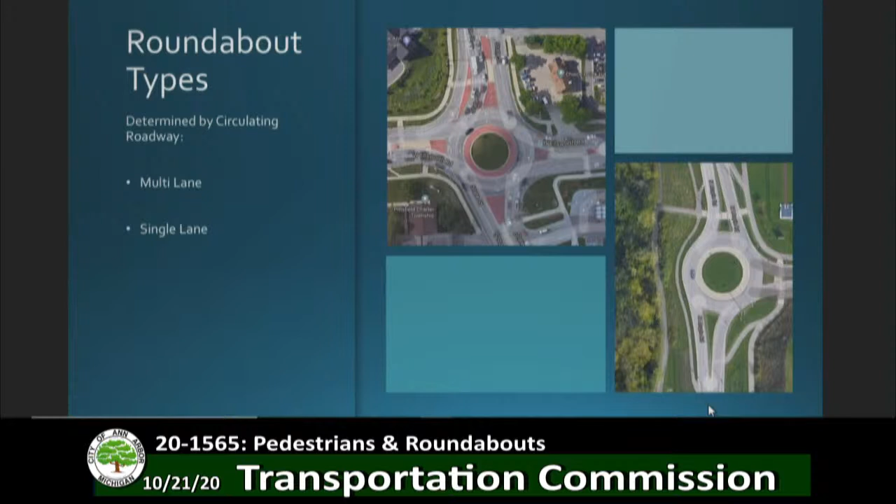The majority of the roundabouts we have in the city are single lane roundabouts. We have 60% that are single lane and 40% that include more than one lane at some point in the circulating roadway. I've listed here a series of where the roundabouts are, the ones under the jurisdiction of the city of Ann Arbor, MDOT, and the Washtenaw County Road Commission. I'm going to kind of skim through that.

The next things we'll be talking about are really the key features of roundabouts and how those go into safety. I'm going to proceed to save time. Our first key area is yield control.

So for a modern roundabout, vehicles yield upon entry to the roundabout. There are really two zones of conflict for motorists entering a roundabout. The first area is where you need to be looking for non-motorized activity within the crosswalk, and that is the first area you will come to. As that has no other form of control, Ann Arbor's crosswalk law applies at this location, so motorists are required to stop for pedestrians within or approaching the crosswalk. The second area of conflict is the yield line, where a motorist yields upon entry to anyone already in the circulating roadway.

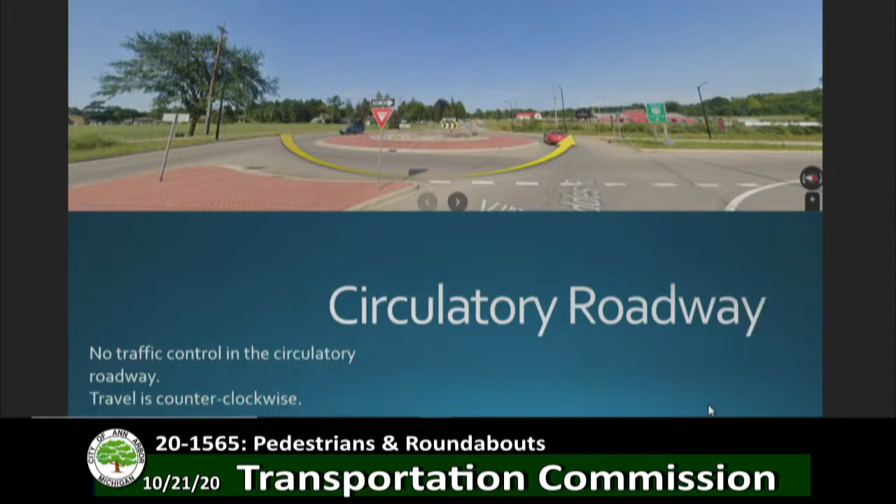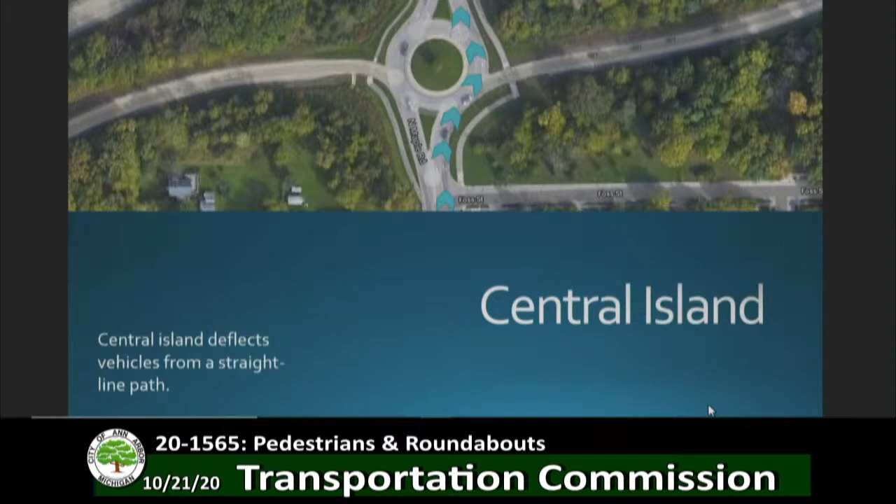The biggest feature of these intersections is their central island, and that central island deflects vehicles from a straight line path, which encourages slower speeds. That's really the big feature that makes this circular intersection so special. Supporting the central island, we have our splitter islands, which are there to separate, deflect, and slow traffic.

Splitter islands also provide refuge for pedestrians crossing the approach. The design of these islands is really important to get vehicles in proper alignment to travel through the circulating roadway and to achieve that initial slowdown. They're really part of reducing the speed along the fastest path of travel across the intersection.

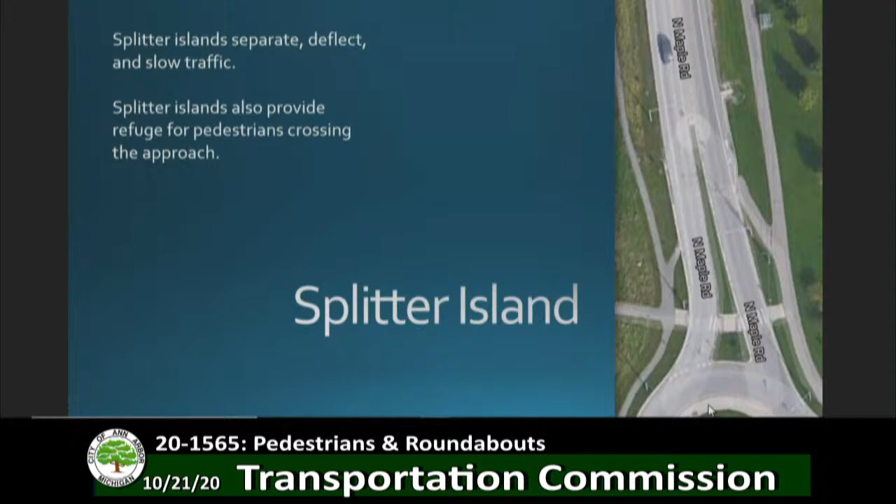Landscaping is another key feature. It provides a visual screen for drivers, making them aware of the intersection and directing their attention to look left.

This particular example is Nixon and Huron Parkway. There's an agreement with an adjacent property owner who takes care of the landscaping at this intersection, and they choose to do a little bit extra with some of the annuals and things like that. This is a really important feature of roundabouts, because you're not supposed to be looking across a roundabout—you're supposed to be looking to the left and scanning for pedestrian activity at the crosswalk as you're entering.

Pedestrian access is also a very important feature in how we design our roundabouts. Pedestrian access shall meet ADA requirements, and crosswalks are designed in accordance with city guidelines.

Some of the questions that came in from the Transportation Commission involved how we do this well, especially for people who are visually challenged. It is true that roundabouts can be a little bit challenging for them—the circulating roadway can make it difficult for someone relying on the sound of an approaching vehicle to pinpoint where it's coming from.

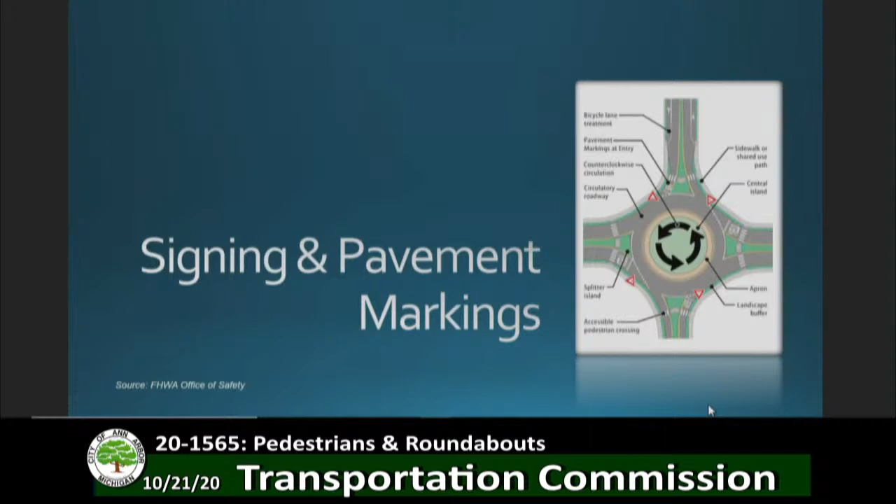There were tons of signs and all of those things. As our collective experience across the country with these types of intersections has matured, engineers and the Federal Highway Administration have come to recognize that too much information can be a problem. All of that signing is really a lot of visual stimuli, and it distracts from the really important things people need to be looking for, which are the non-motorized users and conflicts with vehicles. So that's why you may have noticed a simplification of signing over time.

Streetlights are another really important aspect of roundabouts, and particularly of—oh goodness, I'm running late, Kayla, I'm sorry.

At roundabouts particularly, we are looking at providing positive contrast lighting for the non-motorized conflict points, and ambient lighting for areas where vehicles could be, so that everyone can see a little bit better.

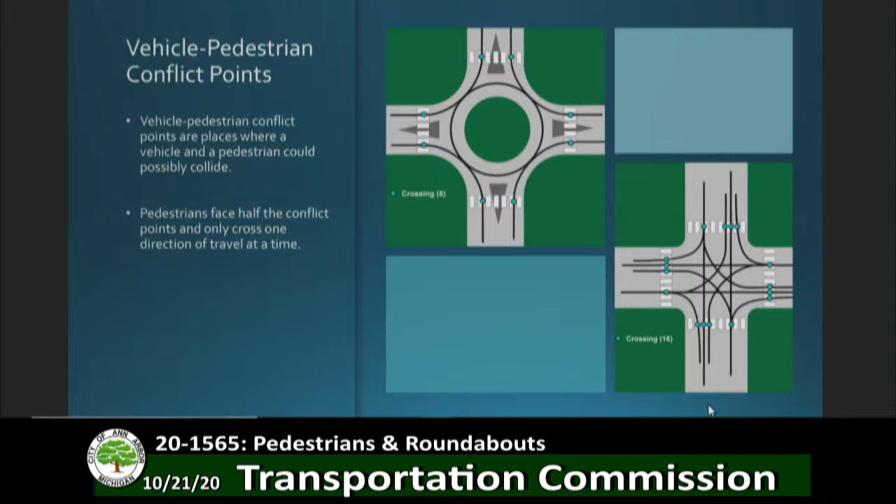Also, for vehicle-pedestrian conflicts, there's a reduction. It's not quite as significant, but the conflict points are reduced in half.

Some special safety considerations—we've probably already touched on some of these. Pedestrians are generally safer in roundabout intersections, although it can be a more active crossing, meaning everyone needs to be actively looking for each other. Pedestrians have the advantage of crossing only one direction of traffic at a time, and roundabout designs really focus on reducing driver speed. So when we slow speeds down, all of those interactions have the capacity to be much safer. When vehicles are slowed down, drivers have more time to perceive and react to conditions, and if someone does make an error, the reduction in speed reduces the severity of the outcome.

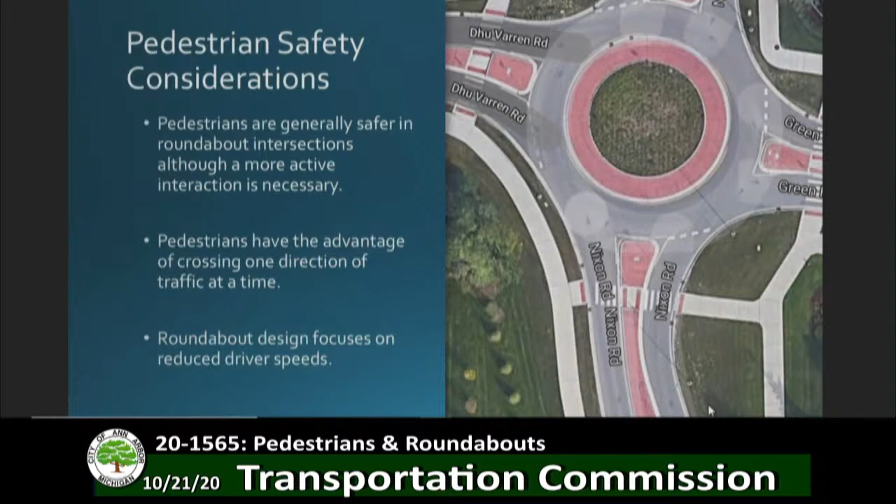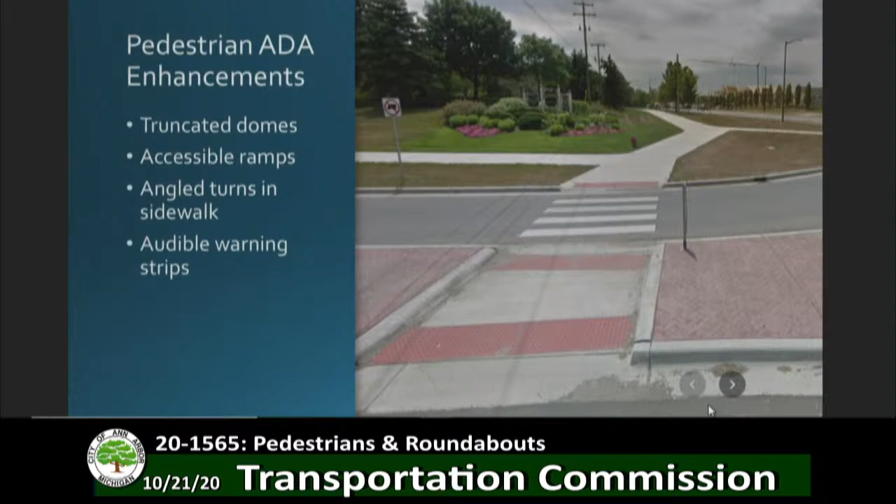Some of the ADA enhancements include truncated domes, accessible ramps, angled turns in sidewalks. We try to avoid curvilinear sidewalks so individuals don't get disoriented about which direction they're traveling, and audible warning strips, as we discussed before. I've also provided FHWA's list of where to consider roundabouts, and it's a very long list with lots of places.

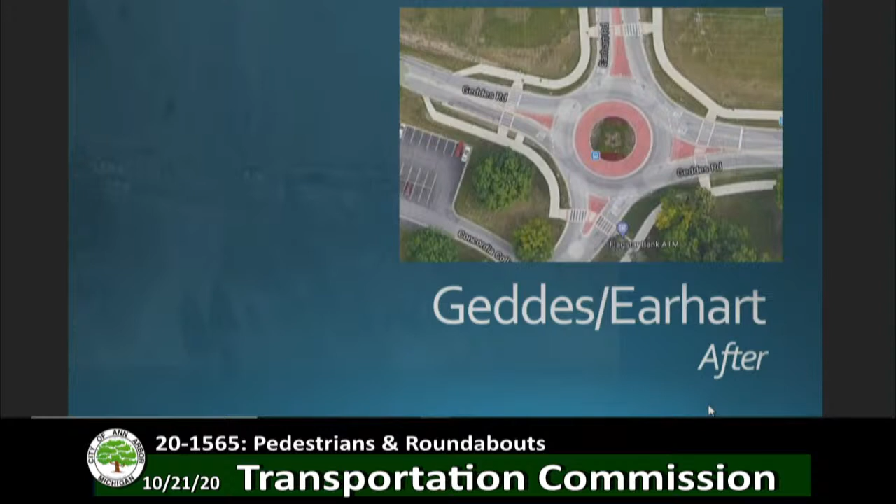And Geddes and Earhart before, Geddes and Earhart after - lots of pedestrian facilities have been installed out there that weren't there previously. So I apologize for rushing through that, but not quite fast enough, I'm sure.

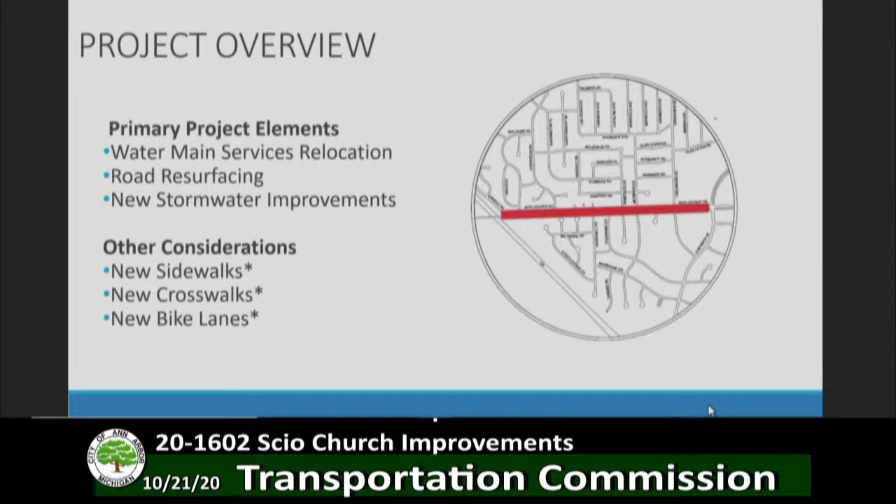We had a public meeting in January where we described all the options that we thought we could consider. We had ideas of where we would want to put the bike lanes, the crosswalks, and the sidewalks, or the sidewalk gaps in our system - the entire project limits would be filled with this project.

We were hoping that everyone would be in favor of that. We had the meeting, we had a poll to consider the bike lanes and the sidewalks, but also we had a large map that everyone could put little notes and pinpoints on where they wanted to cross. There were some locations that the non-motorized transportation plan had encouraged, and we were getting feedback from that.

We described all the options, construction conflicts, and impacts to everyone, but primarily what I'm going to share with you tonight is the feedback we got on the active transportation improvements. First, we polled everyone about where they lived in the property. This is what we got regarding the locations and the residents' involvement.

What the primary interest was in the project - we can see on number E, the active transportation features, that was very large, over 52%.

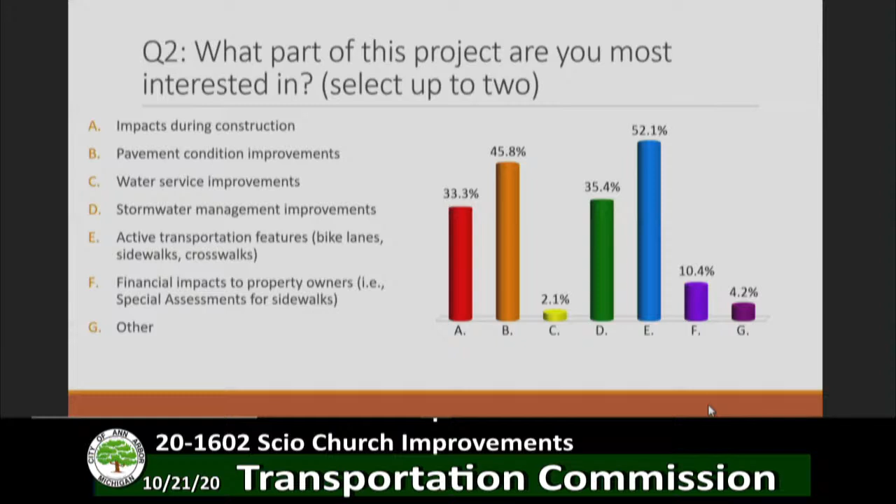There's parking along Scio Church between Greenview and South Maple that we would want to eliminate to install bike lanes, and we wanted to see if people were interested in doing that. So at the public meeting, we did get a 56% yes answer to that. Later, you'll see some more polling that we did on this question.

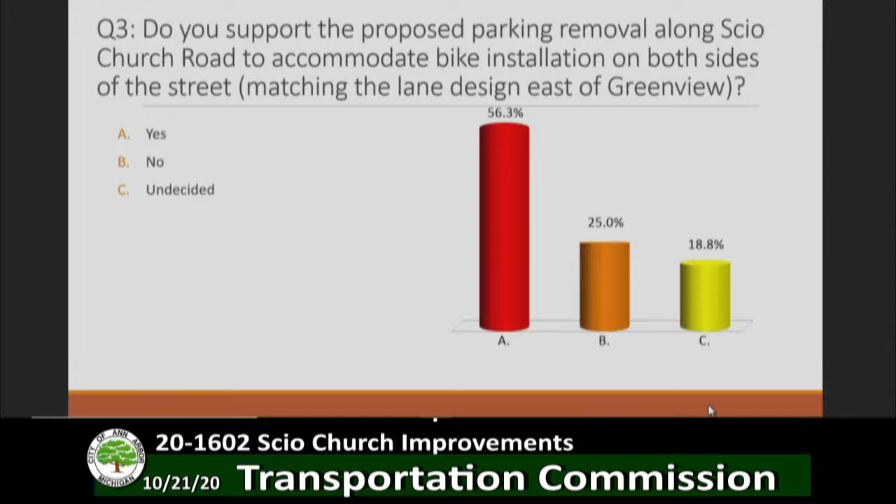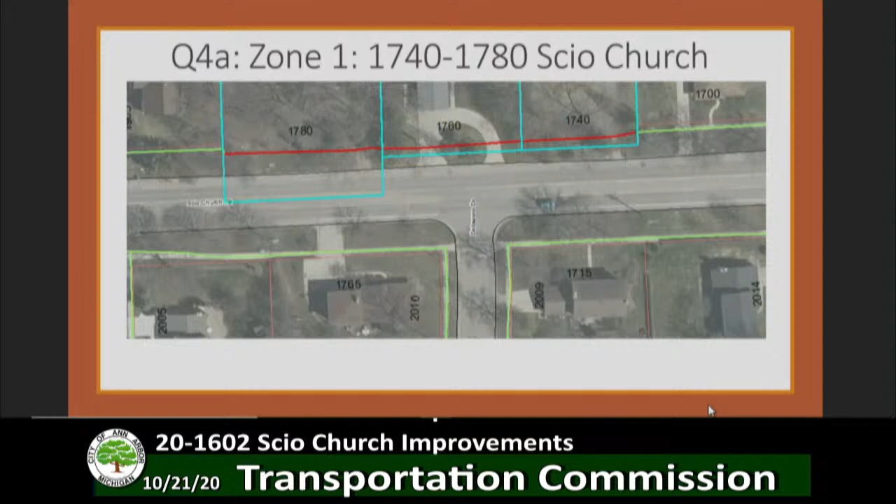As far as the sidewalks, there were two zones. One belongs to the Ann Arbor Public Schools, and the other are 3 lots that are privately owned. So this is the first one. There's 3 lots there that are a gap to the system, shown in red.

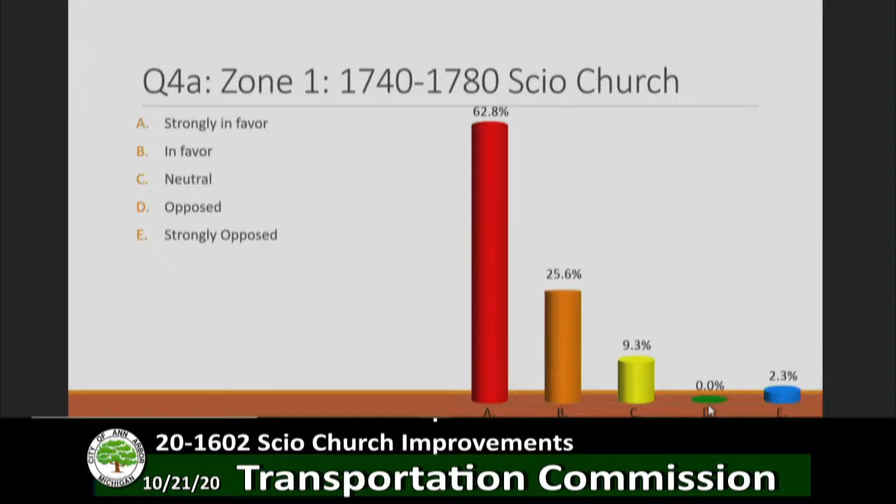We asked if they were in favor or opposed. Many people were in favor of filling that gap. This one with the Ann Arbor Public School System is between Greenview and South 7th, and a lot of people were in favor of that also.

And in the resolution, we also show the comments that people made, if they were opposed or for. A lot of people that were for eliminating the on-street parking didn't have any comments, so you'll see a lot of comments to the contrary, but that will be in the resolution.

So when we took all this information and feedback that we got from the residents and from the public meeting, this is the design that we are proposing for construction for next year. You can see in yellow there, that's the existing bike lanes. The proposed bike lanes are in blue.

We will be matching the cross-section east of Greenview that was implemented also with last year's Scio Church project. It will be a complete biking experience where you'll be able to bike the entire length of this project on either side of the road. However, on the north side of Scio Church, for the entire blue area, that would be a loss of on-street parking, and that would require city council approval.

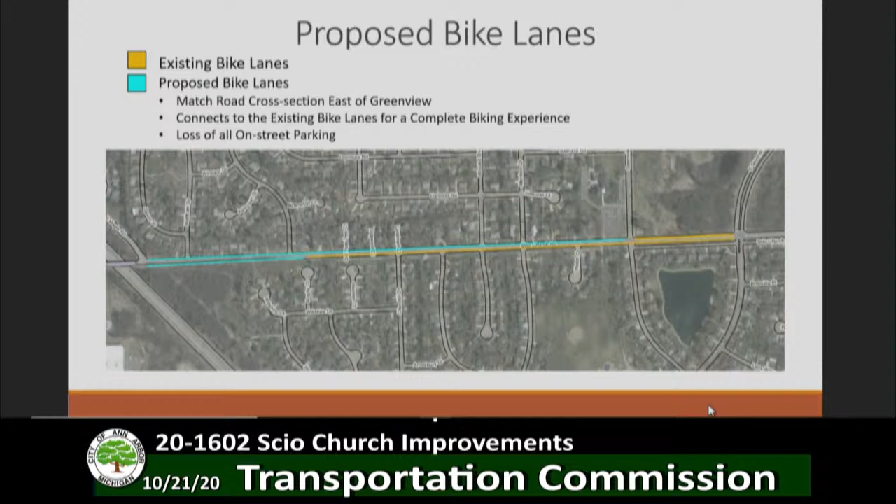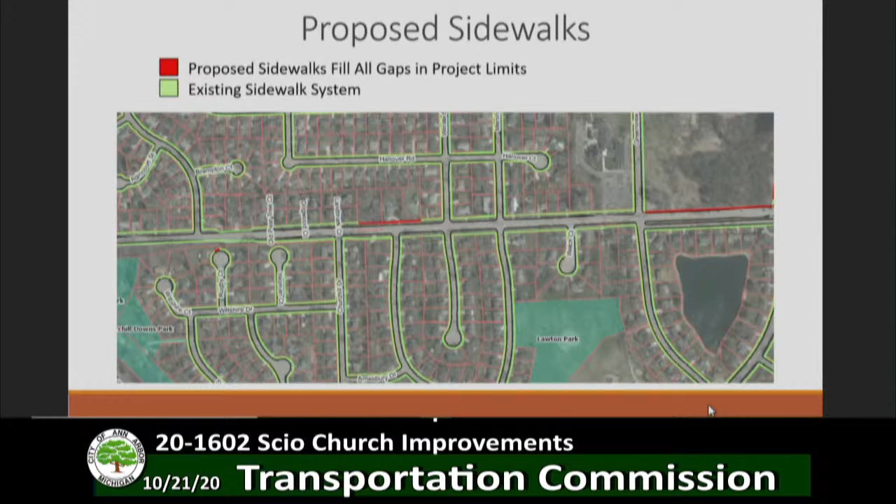The proposed crosswalk locations: now we have east of Covington, a little bit near that Ruby Court, and east of Churchill and east of Mershon.

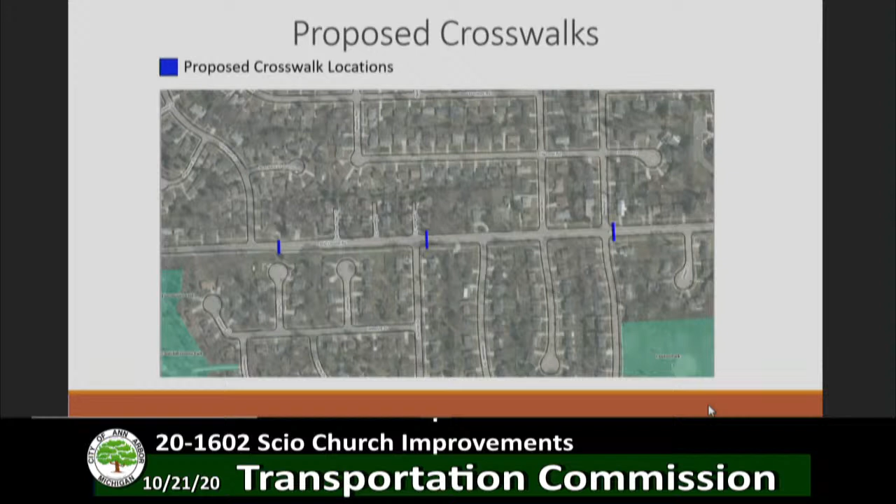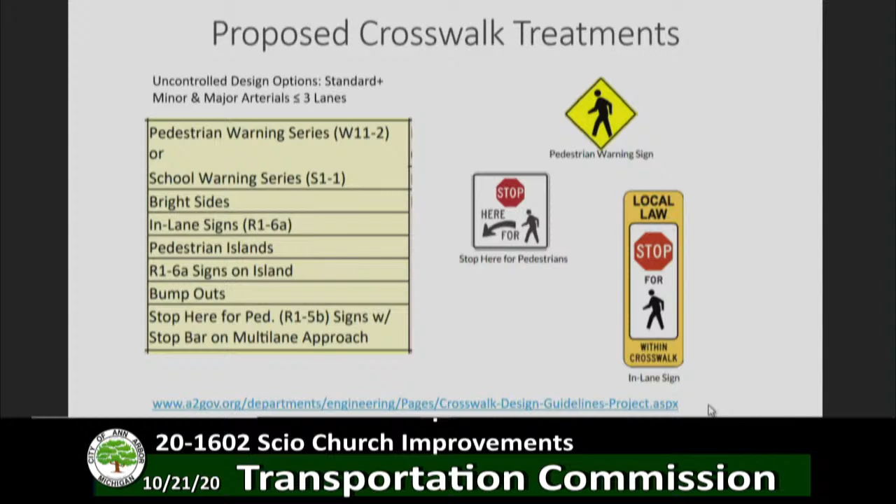Based on the evaluation from the transportation engineers, this is the standard plus crosswalk design. So if Cynthia would like to speak after my presentation about what is actually going to be installed, these are just the opportunities of what could be installed based on Standard Plus, and I have the website there for our crosswalk design guidelines.

And also, you'll notice that's the end of Ruby Court there. We do have an easement for a public walkway, but the grade is too steep there to make a safe crossing to that cul-de-sac. However, you'll see in a later slide that in the next cul-de-sac, Yeoman Court, we were able to introduce a connection between the court sidewalk and Scio Church sidewalk.

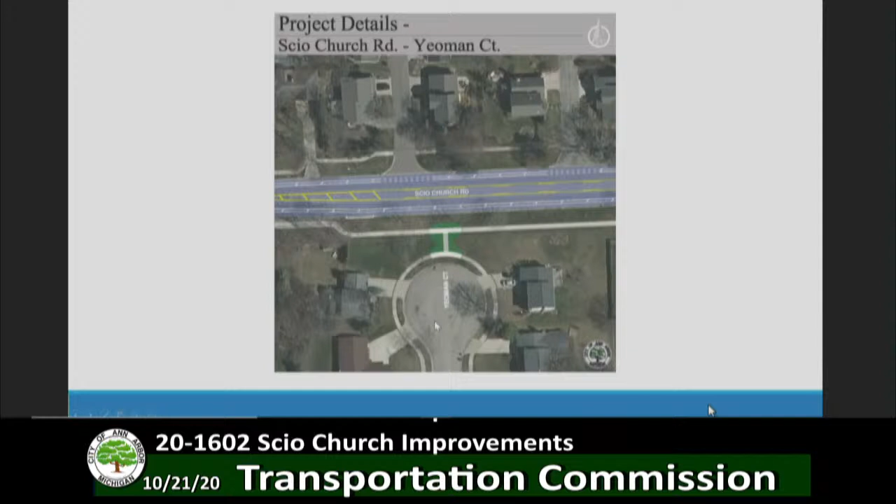So you see there at Yeoman Court. I have spoken to the residents there. There is a resident here that's opposed. This resident isn't, she's reluctant, but she's acceptable of it. It's on her property; she'll be the one to have to maintain that sidewalk. And you can see also, we have a buffer bike lane.

And this just is a view of what the Greenview and Scio Church intersection would look like, and what we're going to implement in the project as far as where we'll be paving, where our improvements will be, what new restoration we'll have. You can see the sidewalk there too, going into the Ann Arbor Public School System property.

We are going to be, you'll see it's winding into their property. We're going to have discussions with them regarding getting an easement because there are large trees that we want to save there. They were open to that on the other section of Scio Church, so we hope that they will be open to that as well here.

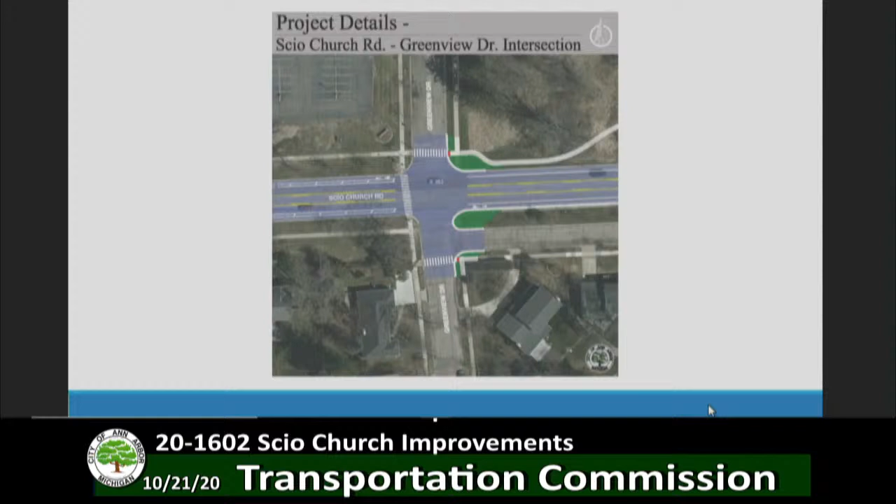And I know my time was very short. I can go back to any slides anyone has questions about.

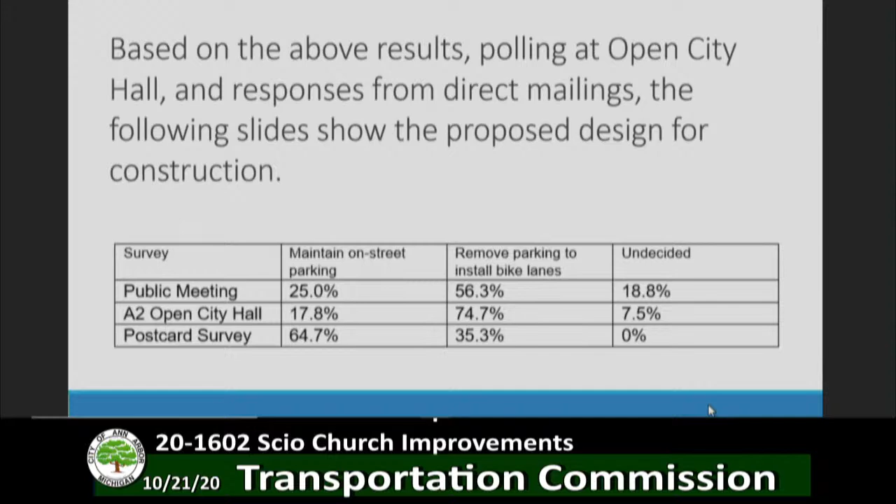There were 48 community members who took the survey at the public meeting in January. 146 surveys were taken online through A2 Open City Hall, and 17 postcards came from adjacent property owners. So we have the total numbers of how many people, and those translate into the percentages. We don't have a chart readily available showing the number of people in support or opposed, though we could calculate it. That's helpful, and I see that also in the memo, thank you.

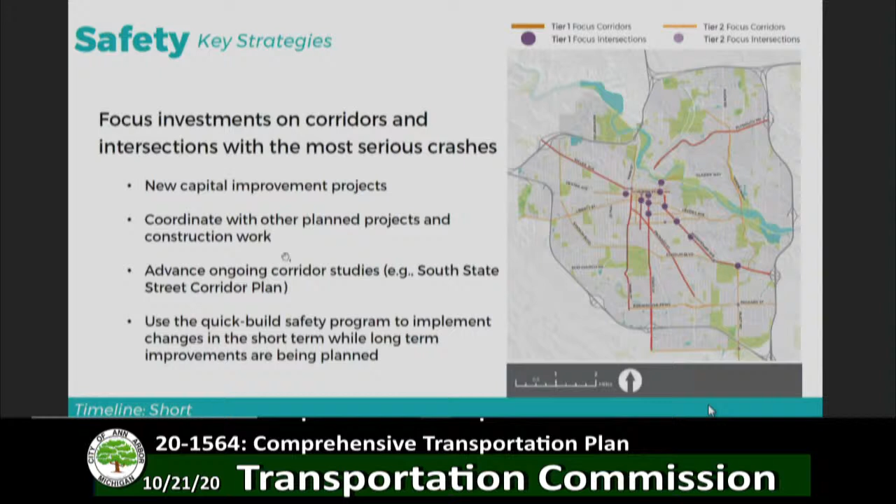So I know that the quick build program was of interest to this group. That's definitely a strategy that we think is very important to improving safety in Ann Arbor. And so we've incorporated the idea of developing a program as a strategy, and then coupled that with a toolbox of different treatment types to give you some ideas of how to move forward with that strategy.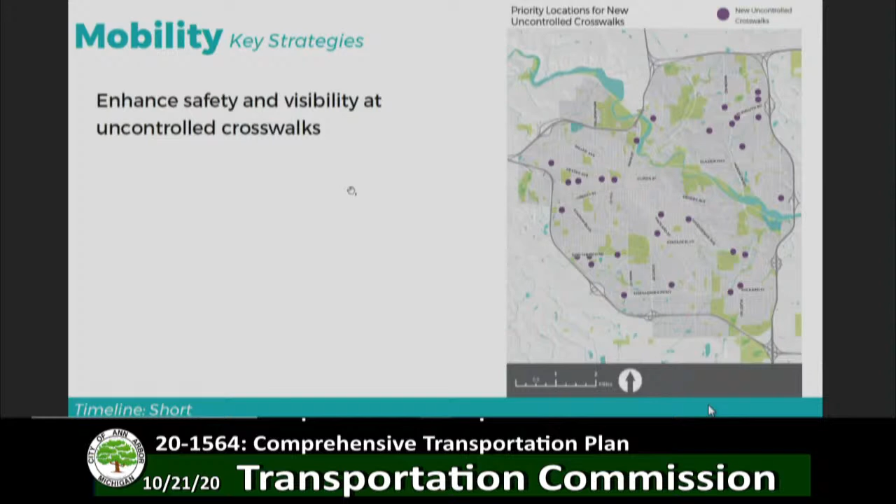So how will we track progress towards mobility? We're looking at how much of the population has good access to that all ages and abilities bike network. Right now you're at 51%, and we think you can get all the way up to 97% by 2030. With respect to transit, we're looking at how much of the population is close to a high frequency route, and we think you could go from 26% to 66%.

This is also in service of meeting the goals of the A2ZERO plan. So tracking share of trips made by walking, biking, and transit is another recommended way to track progress, and how many shared mobility vehicles are available in the city, giving people other options. So when we say shared mobility vehicles, we don't just mean cars, we mean bike share, we mean e-scooters as well.

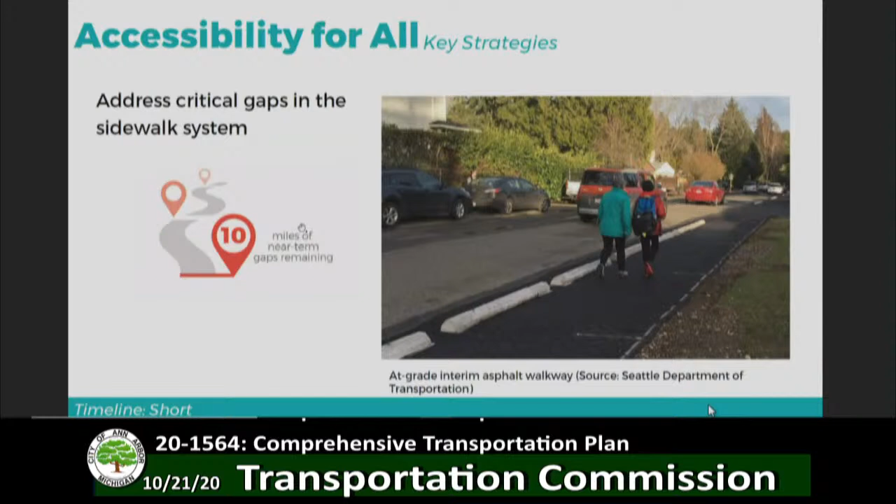With respect to accessibility for all, I think the most important strategy in this realm is completing the sidewalk network. The city had already identified some near-term sidewalk gaps, and we recommend continuing to infill those, with those being the first focus, and then following that, focusing on major streets and then the remainder of the system.

Also with respect to accessibility, in a different way of looking at it, we've recommended expanding the reduced fare program for transit and shared mobility services. I wanted to note here that we actually think the Ride is doing really well with this already, and it has some pretty progressive policies, but just building on that expands accessibility of transit to others throughout the city.

And then a focus too on creating shared streets. This was of interest pre-pandemic, and I think now that you've gone through the Healthy Streets program, you probably have a lot of lessons learned there and a lot of good experiences that you could draw from.

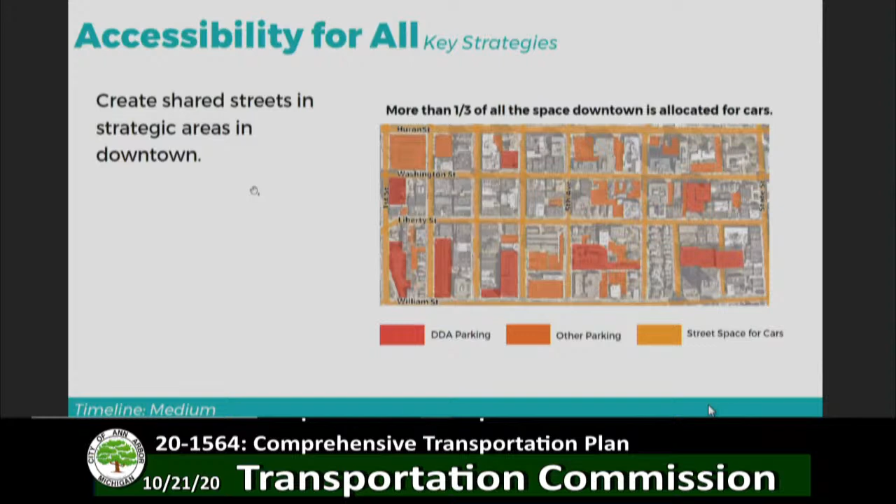With respect to accessibility, some of the targets we recommend gauging against are transportation costs as a percent of household income.

Again, in Ann Arbor this is actually lower than, I'd say, the national average or peer communities. But we do think you could do better, and that it's worth striving for better.

And then expanding the average number of jobs available within 20 minutes via different modes. Currently, getting to jobs is easier with a car, so we want to expand people's reach to jobs and give them options beyond the car—how many jobs can they reach by transit or by bike.

Another area where the city is doing very well is ADA accessible bus stops. At 89%, that's really impressive, but we still want to strive for more. So we think aiming to get all the way to 100 by 2025 is a good goal.

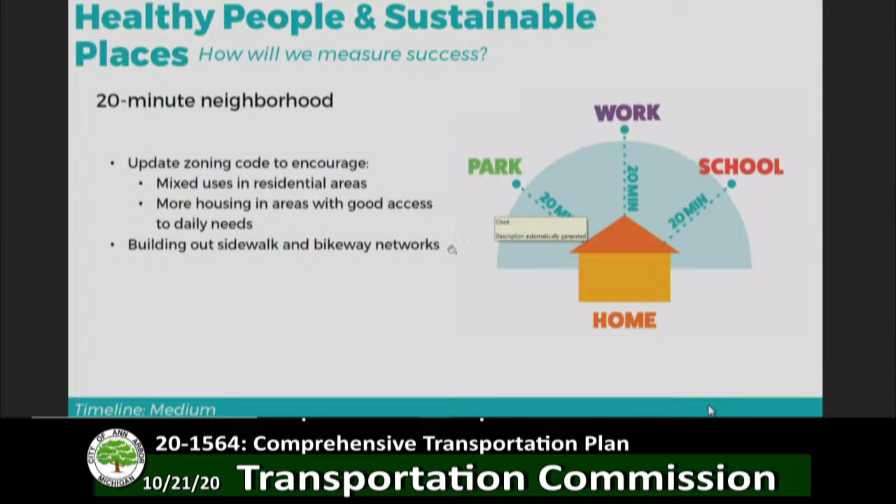In this section, we're also suggesting better aligning parking supply with demand. This is a bit on the land use side, but getting parking right is really critical to creating a walkable environment—so updating the Unified Development Code to remove parking minimums so supply can better align with actual demand.

Metrics here include reducing the average vehicle miles traveled per day, increasing the share of the population living in a 20-minute neighborhood and achieving 100% by 2030, and increasing the share of the population currently meeting physical activity guidelines.

Finally, with respect to regional connectivity, one of the things driving this strategy is that we're seeing a lot of roadway delay concentrated at rush hours. So we think developing or expanding the transportation demand management program that exists downtown, expanding it citywide, and encouraging other employers to build on that.